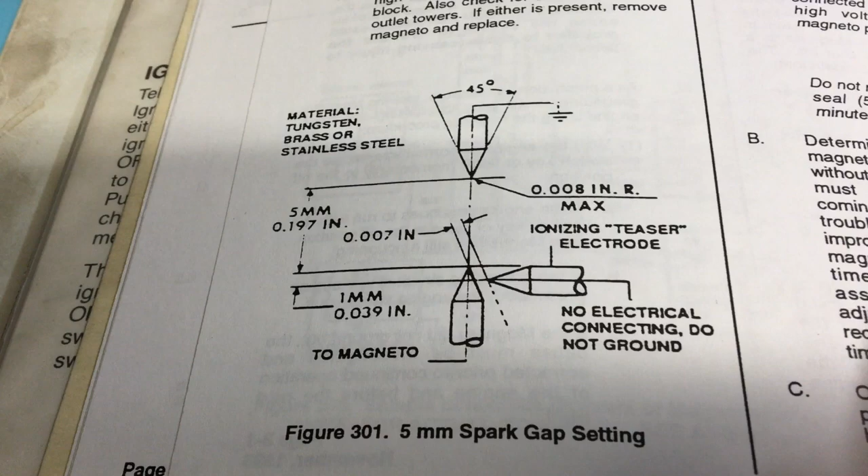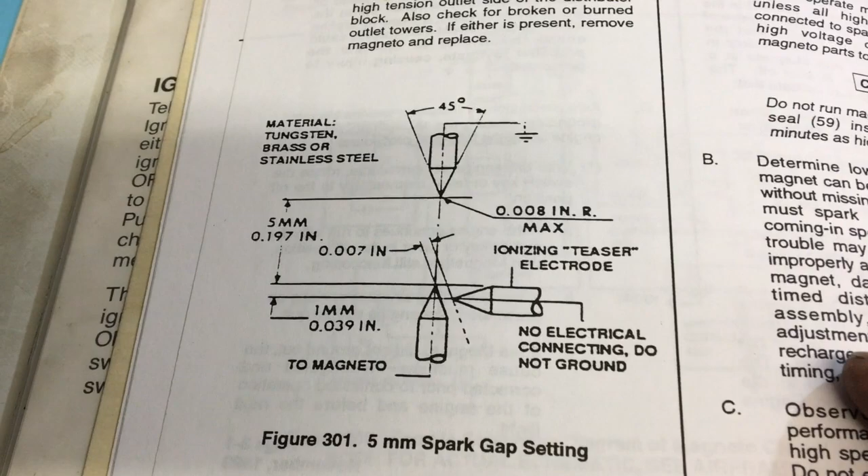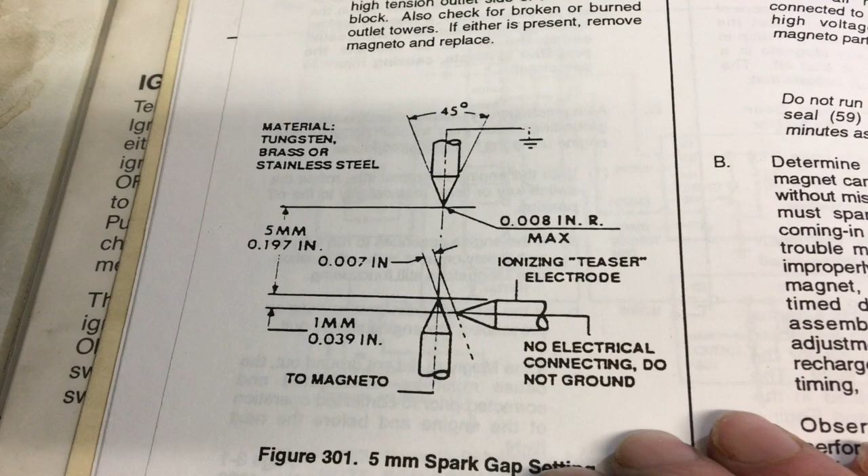I'm going to start by addressing a comment from a viewer who's interested in building the magneto test stand. I did a few videos on that. Having trouble working out how to build the test gap and how to mount the electrodes.

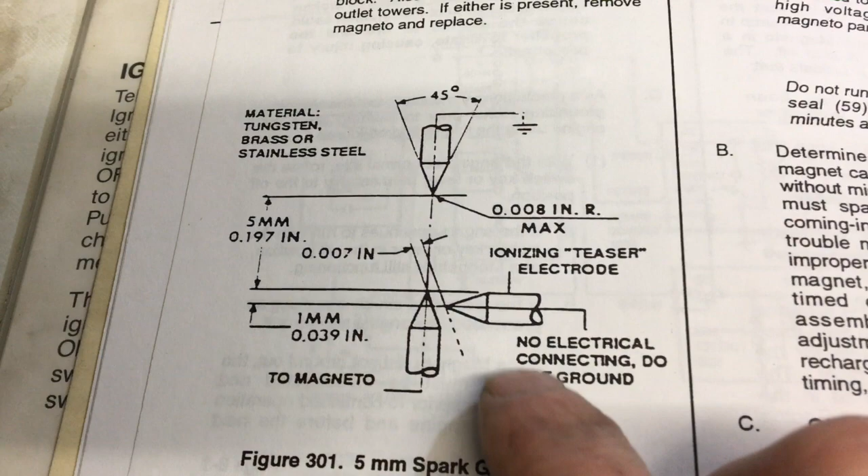This is a very typical test gap, from the Bendix manual. Magneto to ground, and there's the teaser electrode - no electrical connection, do not ground. This just does something weird by being next to this electrode, helping the air ionize and start a nice stable spark. Again, I don't fully understand it, I don't think that matters, but it's there.

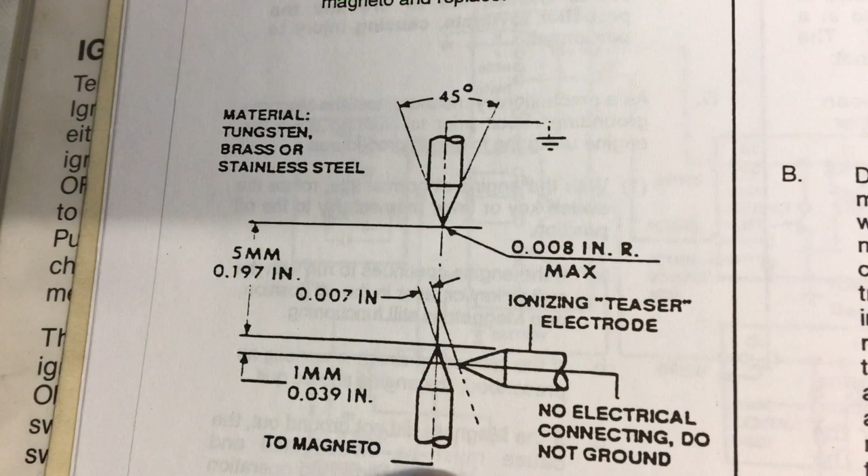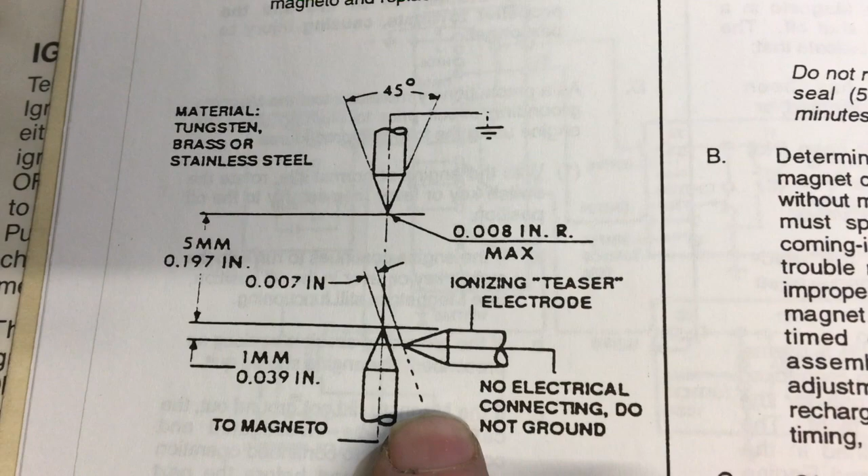I think if you pause the video here, you'll be able to see how to build the test gap. It says material tungsten, brass or stainless steel. For me, TIG tungsten immediately sprung to mind, and that's what I was going to use. So what we'll do is I'll quickly show you what I would have done if I hadn't been able to find one on eBay, to build one fairly quickly and easily - these are the ideas that I had. Let's have a look at it.

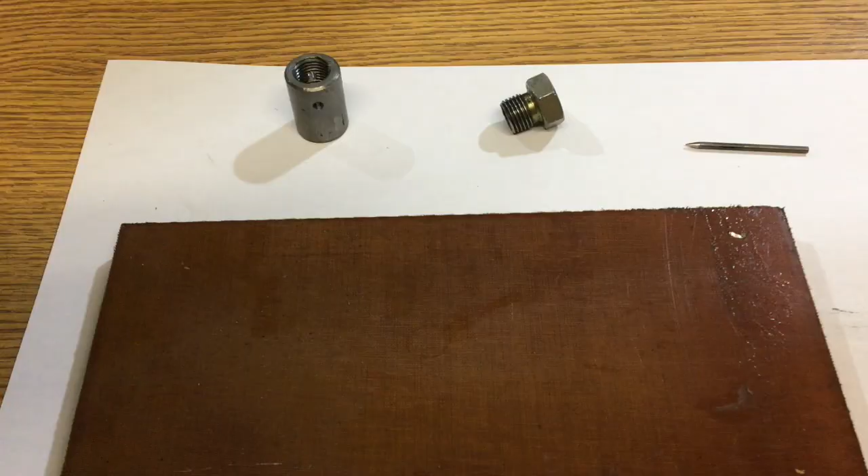This is just one way that I thought of doing it. I don't know how much access people have got to machinery and lathes, but if you have a drill and some bits, you can probably knock up one of these fairly quickly. If you're a time-is-money kind of person like we have to be sometimes, then this is probably a fairly easy way of doing it.

These are some hydraulic couplings. You could also use coupling nuts - choose a suitable size and thread. This is actually a blank. Screws into that.

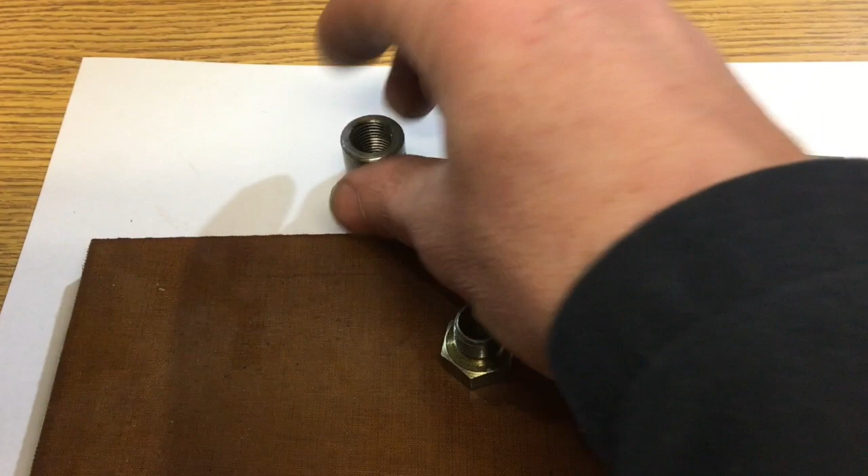And this is my TIG tungsten, which is hard to do on camera, but it can go through the hole like that. The board can be drilled. One blank can be screwed up through the bottom of the board to locate this, and one blank can be screwed down through the top to lock the tungsten in position.

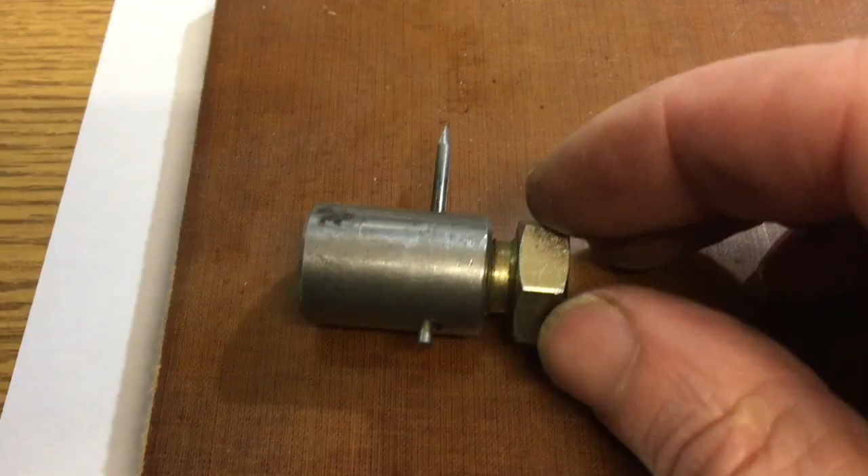Okay, let's just do that. Right, so there's my TIG tungsten screwed in. I can snug that down. That'll give me a little bit of scope just to adjust that as required. Another blank coming up through the bottom of the board to locate that, and I've got some wiggle and swivel room there.

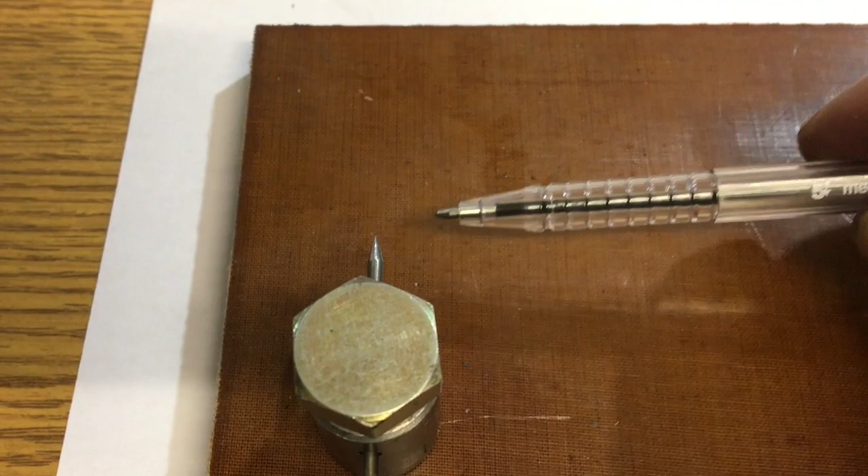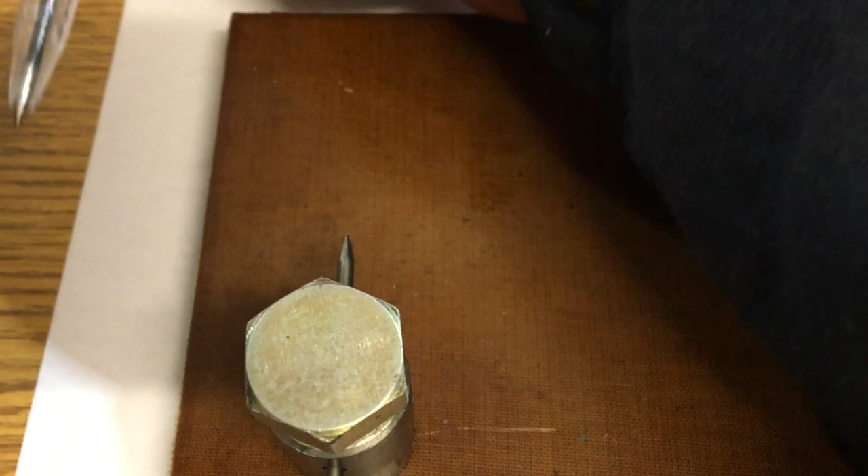You're going to need, for each gap that you want to fire, a teaser electrode, so you're going to need another one about here with the teaser electrode coming here, and another one here to form the ground.

So that would be a quick and easy way to do it, and I'll just show you the one that I actually bought off eBay because it's very similar.

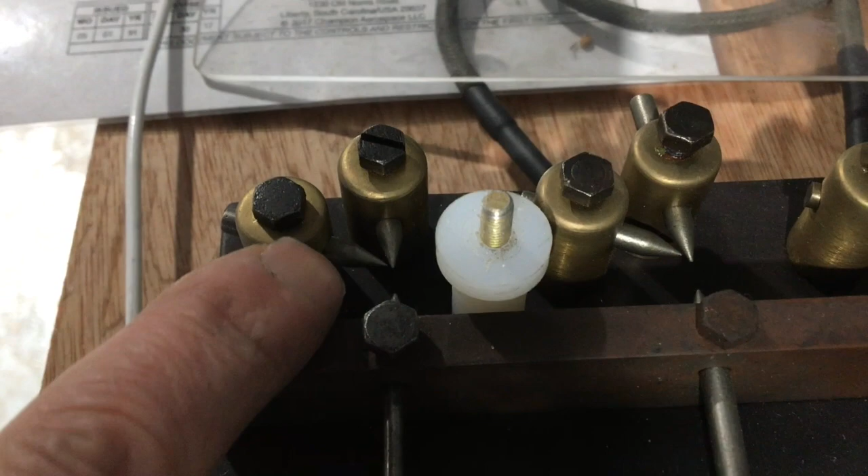Okay, so this is the eBay item that I bought. You can see it has these little brass towers, the main electrode, the teaser electrode, and instead of individual grounds it's just got a solid bar. Obviously you'll need one gap like this for each cylinder of the mag that you want to test. This has 6.

And then we just made a little acrylic cover to fit over there, and some nice little brass knobs because that was kind of fun, and it stops you putting your hands on the 10,000 volt spark there accidentally, which is usually a good thing.

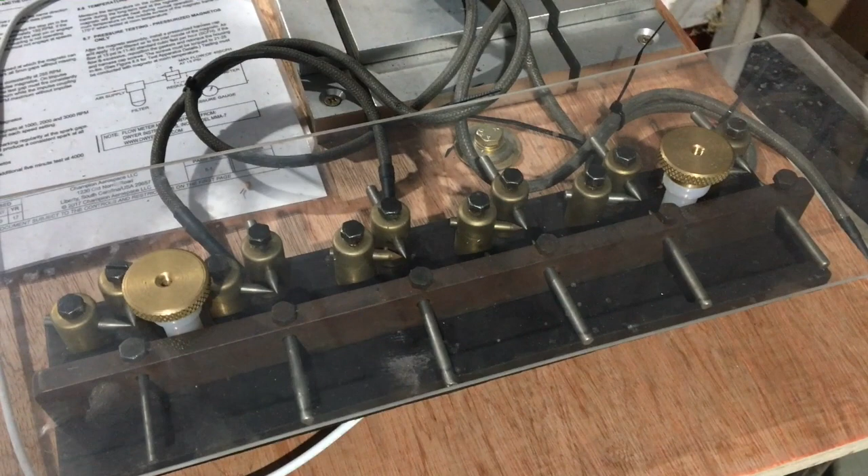And that was it, and I hope that helps if you're trying to build a mag tester. That's the spark gap, hopefully explained, and a reasonably easy way to build it.

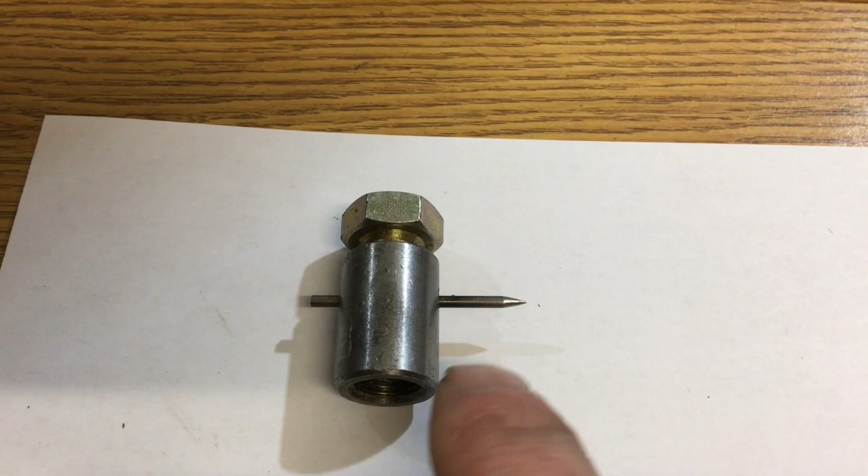I'll just quickly recap. The board is just Tufnol board, which you can buy online. TIG tungsten, as you can get online and sharpen up on a grinder. And as I say, if you had nothing but a hand drill, you could get some coupling nuts, which might be a bit easier than this because they have flats on them - they tend to be hexagonal.

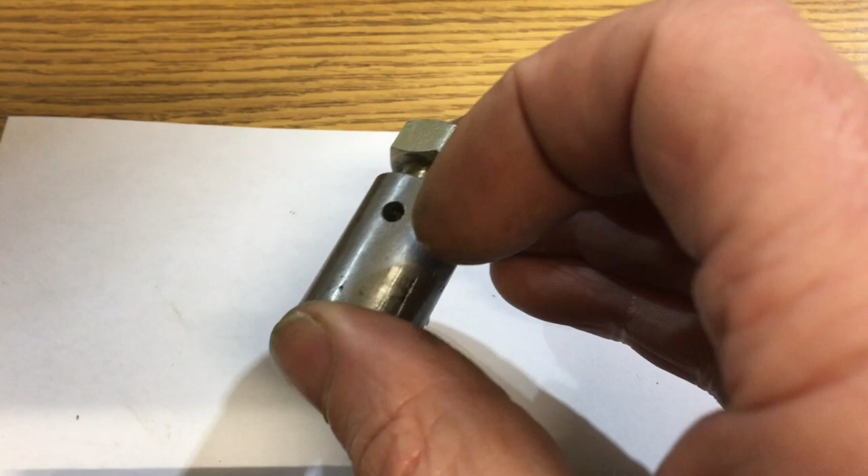And as long as you could build yourself a little jig-type device to make sure that you got all these heights consistent and drill through parallel, you're going to have a usable thing here, because you can rotate and position these almost infinitely. Drill the holes in your board for however many cylinders you want to fire. Done job. Hope that helps.

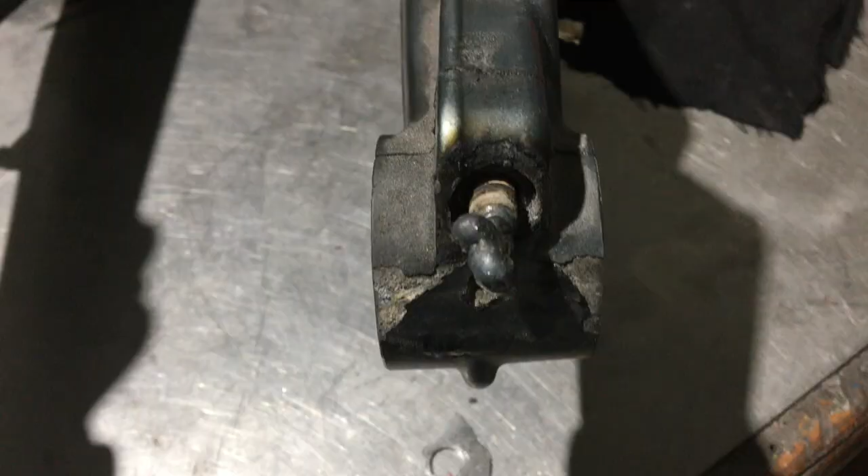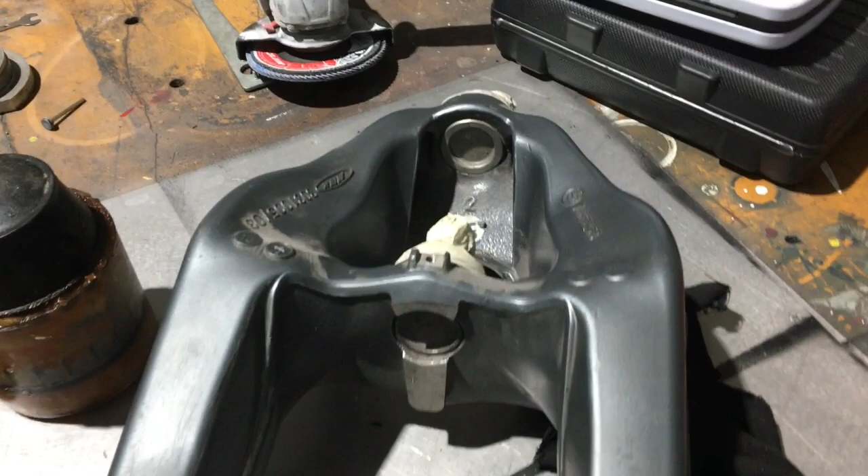Alright, so here's tonight's little challenge. This I think is part of the suspension off a BMW motorcycle. The wheel I think goes in here. It's one of those strange German things where it's got ball joints in here. It operates more like a giant wishbone than motorcycle forks, but that's by the by.

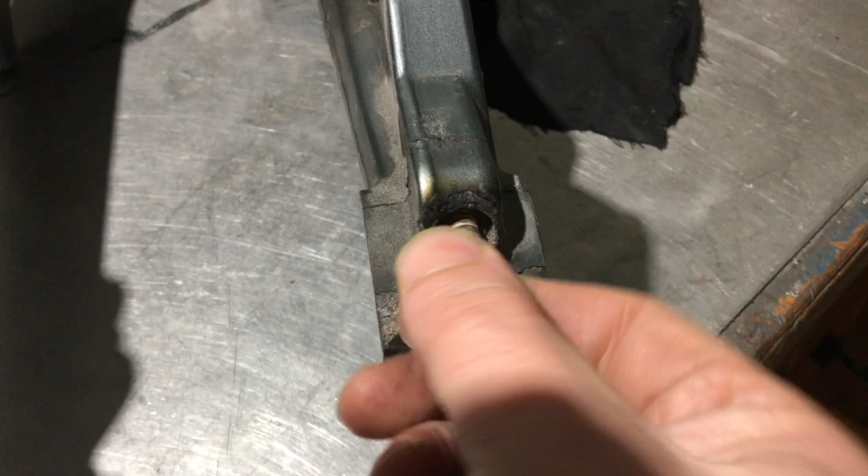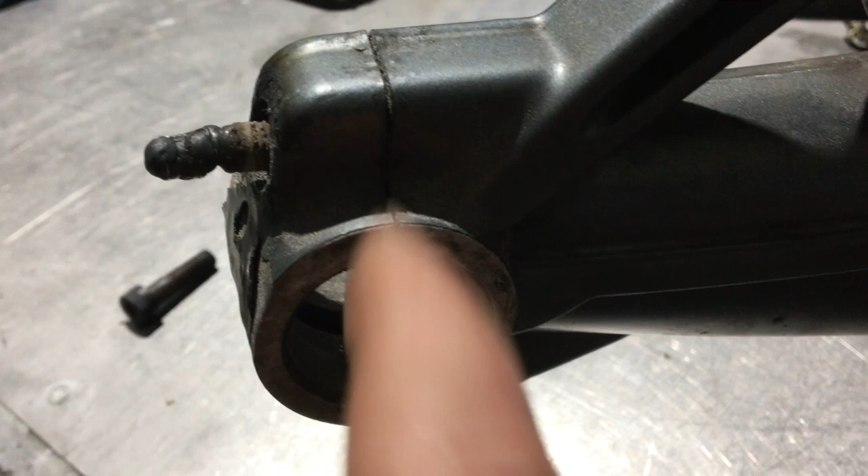Its owner has an issue with seized in bolts. Well, this side, the head was sheared off it and it was seized in. They're actually pinch bolts that clamp this arm onto some axle bushings. We see it better from there.

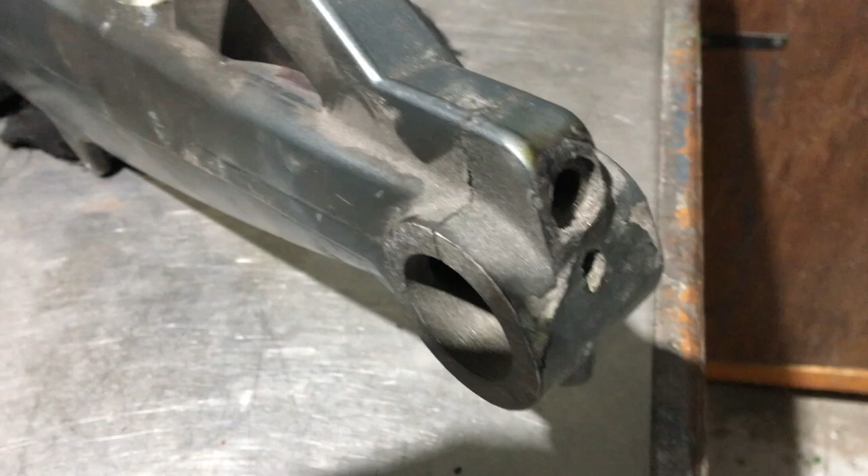This one, the head was sheared off. We just welded a big blob on and wound it out. That came out, and they often respond to the heating and cooling and just give up when you do that. So, full of confidence, the other one had a head on, but it was rounded. I filled it up with weld and snapped it right off. Put another blob on, snapped that off, and I've tried three times and it hasn't worked.

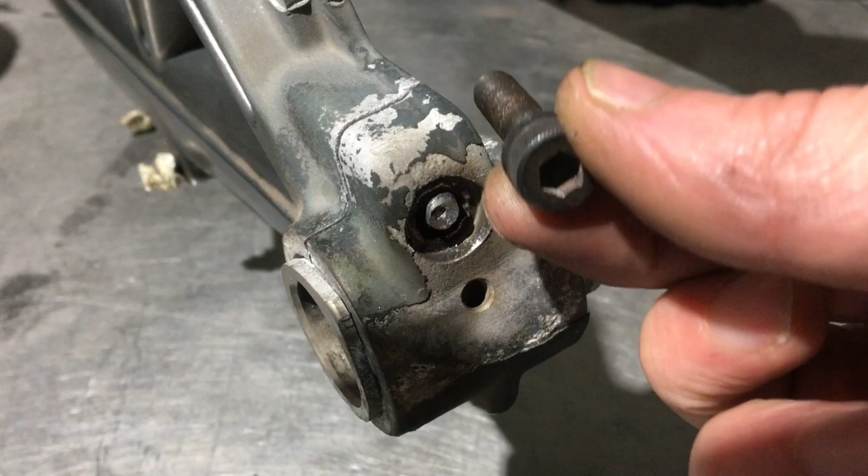And that was mistake number one, because while it had a head on, I had a good option of drilling it, and that's probably what I should have tried first. Alright, but that's life. So if you've got a fastener with a head on, you've got a good option on drilling. Put it in the mill, center up, indicate the head. You've got good options there. I've lost some of my options now.

Luckily there's a spot faced area here, and it's reasonable to assume that it was drilled at 90 degrees to the split line here. So we'll set it up in the mill, see if we can't get an end mill on there, create a flat spot and start drilling. The other problem with welding first is that I've probably created some really hard and soft areas in there. It's going to try and make the drill want to wander off. But we can only try.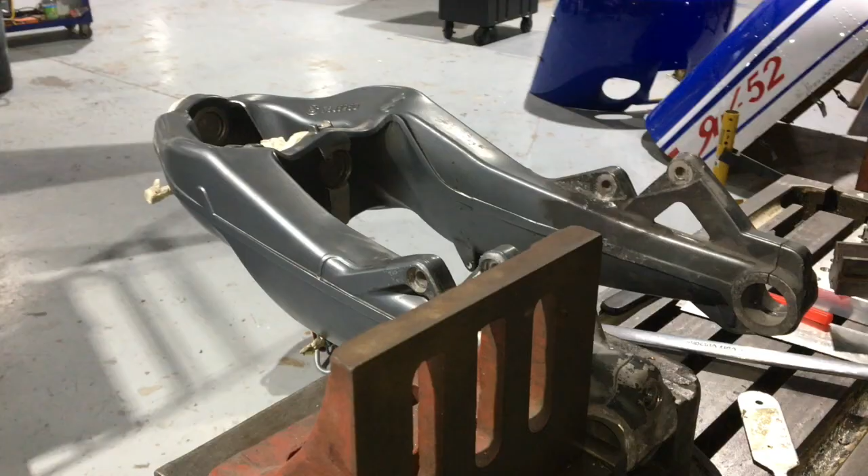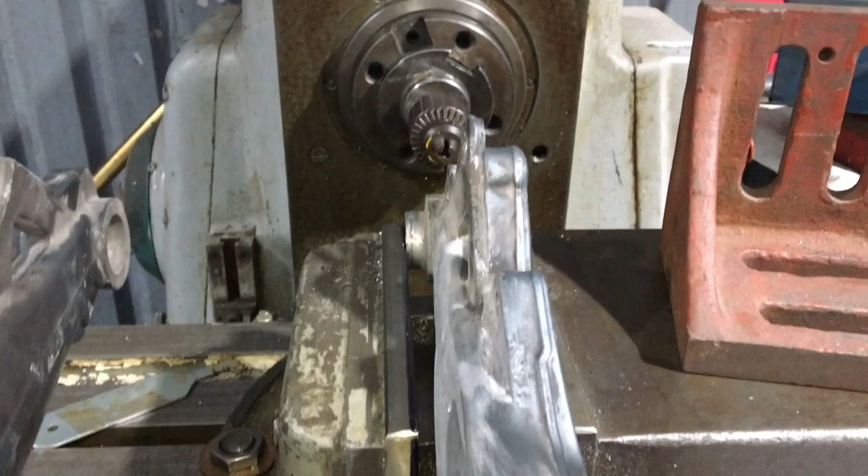Alright, so let's get it in the mill and see what happens. Right, here we go. Luckily this setup is not challenging. I can get a good grip on there with the vise. I've trammed this jaw parallel,

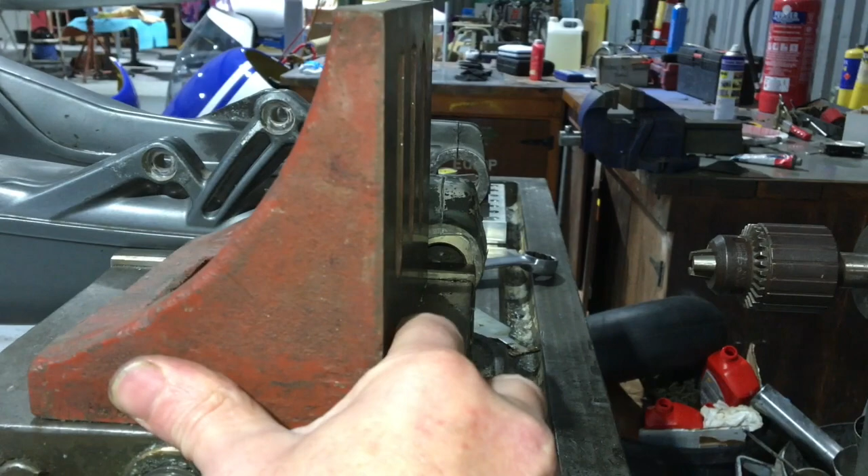and I just put my angle plate on top of the vise here. I can actually get a really good eyeball on that split line being vertical there, and that's going to be good enough, I think, for this. I'll get an end mill and see if we can't create a flat spot on the end of that, what's actually now a weld blob there, and then we'll start drilling carefully and see what happens.

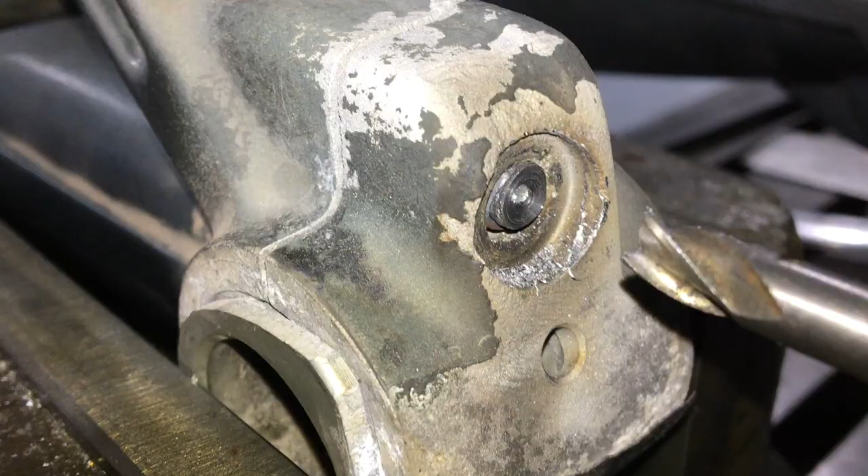Alright, that was extremely painless, and it gives me hope that this thing, at least for the first quarter inch, ain't going to be incredibly hard. I might do a little more to that, and then I'll get a drill, try and center up on this spot face here and go hopefully right down the middle. Bring you back in a minute.

Alright, I just went in with a centre drill first. Now I'm going to come in with a decent cobalt drill. We got a new guy in the shop. He's awesome at grinding drills and a very good machinist, so better than me probably, but I'm still going to give this a go. And in fact, he's a lot better than me. He used to run a grinding section doing precision grinding, cylindrical grinding, centerless grinding, all sorts. So great addition to the workshop here.

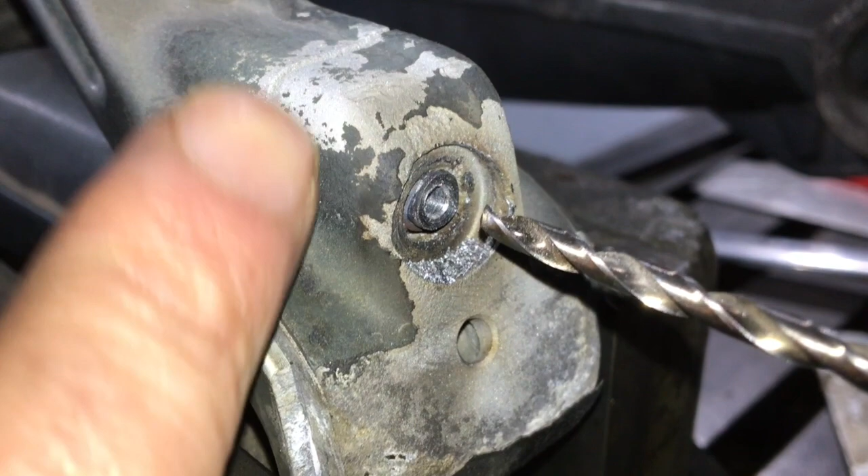We'll just drill down this carefully again. Hope we don't hit any hard spots. The hard spot, if there is one, is going to be wherever alloy the bolt was made out of has diluted the weld metal, and they've cooled quickly or rapidly, or been quenched by this big aluminium frame and gone hard. We may hit that.

That's why it's always a good idea to drill before you heat and weld if you can. As I say, I made a mistake this time. My confidence, this one came out easy with the welding trick. This one is really stuck in there. So if you get the chance to drill first, particularly if you've got a milling machine, it takes a few minutes to set up and do this. That's the way you want to go before you start welding, I think. Anyway, let's do it.

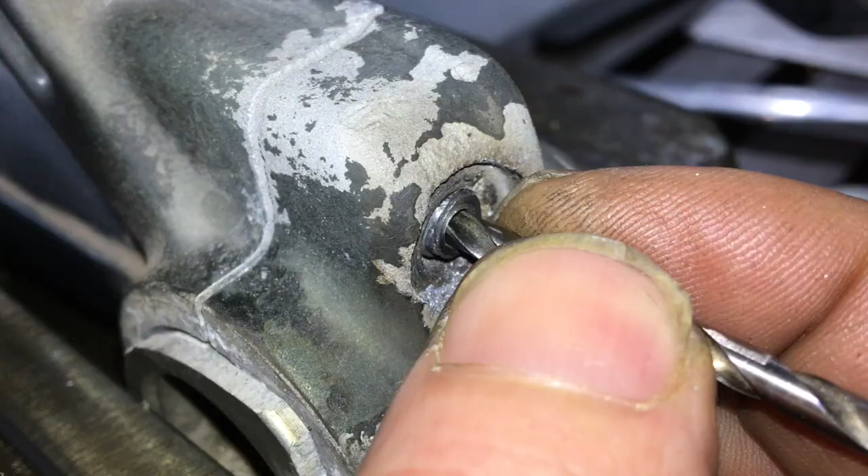That was all going so well until, maybe half to three-quarters of an inch down, we've hit something. I think it's actually the start of the threaded portion, and that fastener has took the edge off my drill. Focus, you.

I'd have thought we're through the heat affected zone by now. It's just a very hard, strong fastener. I'm going to sharpen this drill again, use some cutting oil and slow it down, just to see if we can get as far again. And we'll consider the options: easy-out, or drill all the way and pick up the threads. Alright, I'll bring you back in a second.

Alright, we went carefully that time. I think another quarter inch and we'd be down to the depth of the old fastener that was in the other side. So that's what I'm going to do.

And then I've got a couple of options. One is to drill a clearance hole through this top here, the full diameter of the fastener, and try to extract the threaded part, maybe with an easy-out or something like that, and lots of heat. And if the threaded part doesn't come out, we've got the option to carefully keep drilling and picking and tapping, and generally hoping that we can shift it.

So we'll just go a little bit deeper, and then we'll have a bit of time just to consider where we go.

Alright, we got through it, and I felt my drill break through the bottom into a little void before the soft alloy, so that's very encouraging.

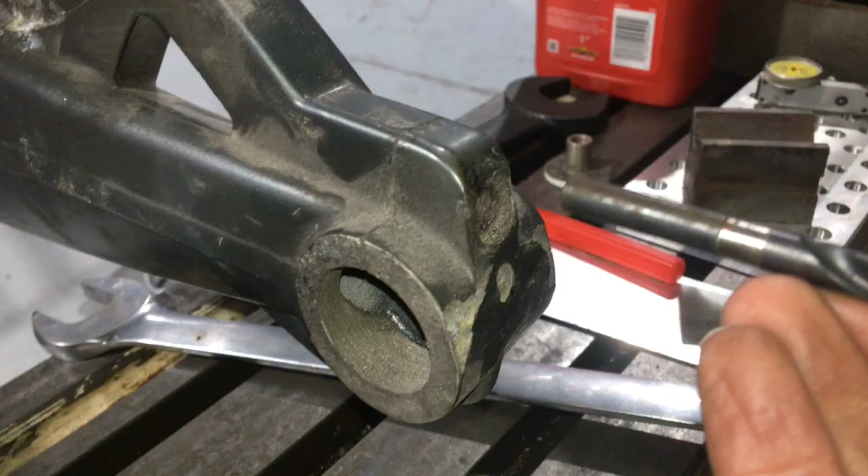I think I am going to get a clearance drill and try to take the shank of this out just by pecking away at it. I hope it doesn't go off centre. I think if I peck carefully it'll be okay. Alright, luckily I've got the other side for reference.

I've selected a suitable drill for clearancing. We'll pop that in there, and we'll really carefully peck away at that shank and the weldy blob, and see what happens.

By the way, this part from BMW is many thousands of pounds, and I'm told by the owner that even a second-hand one on eBay is going to set him back over £1,000, and that may be no better than this one. So I'm trying quite hard not to mess it up.

I'm confident we can do something with it. I mean, there's quite a lot of meat around here. Even if we had to oversize it, helicoil the bottom, and put a bush in here, it would be doable. So I'm going to persevere.

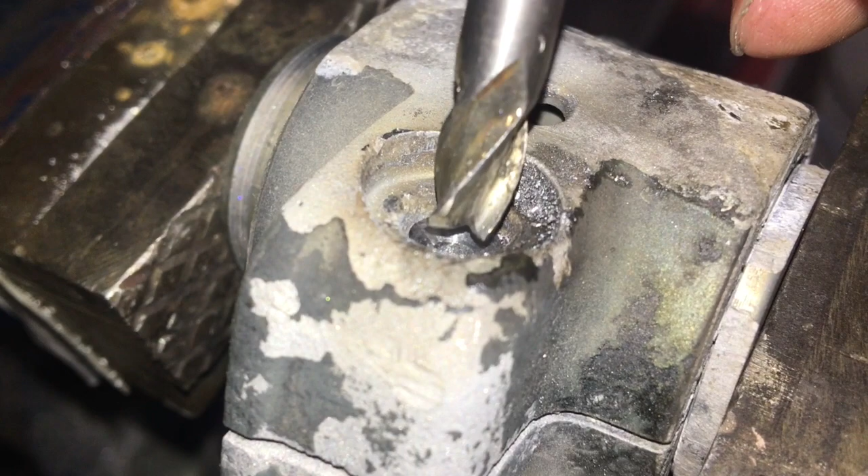I know there's a hard spot in there. It's probably worth sacrificing the odd end mill to make very sure that we don't walk into the aluminum and screw it up, because it's one of those parts. It's worth spending an extra little bit of time for the value of the part and the fact that it's difficult to replace.

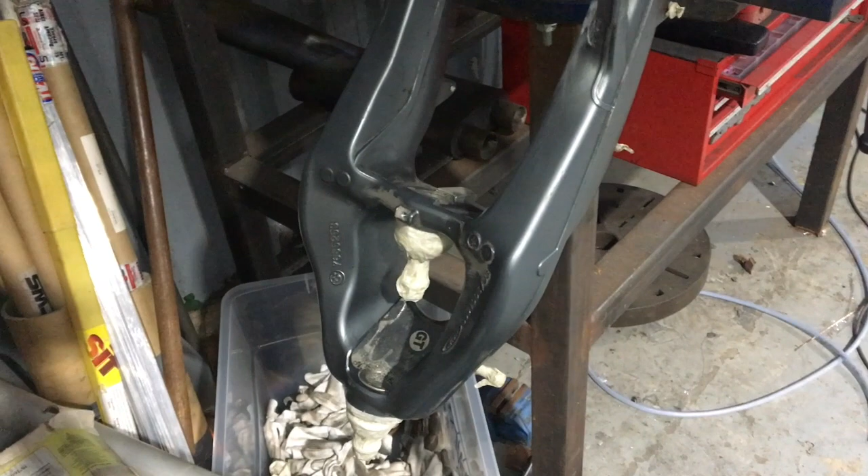So I am going to go home now and get some sleep and worry about it another day. Thanks for watching.

Right, much as I wanted to get home, I kind of couldn't leave that, so I started with my little end mill. It's actually corrosion on there.

Carefully, focus, nibbling away at it. It's hard to see, but it's working. I'm not cutting the alloy away, I'm getting rid of that shank. Left a tiny bit of steel at the top there, I think, but

so far so good. Going to persevere with that carefully till I get to the split line at least, and then pick out the bits of steel and see where we go with the threaded part. Good night, this really is good night. Cheers.